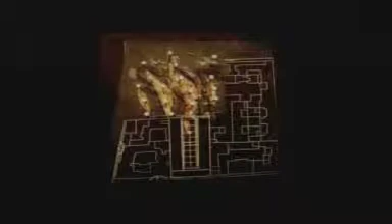You can make compositions on the plasters to see how the movement and the space works, and then you go one section at a time, the various models that are the elements we work with to make the proportions and work on the volumes.

And then slowly and gradually we concluded with this plastic model in the first part of the competition, because we believe that Rome, a warm, Mediterranean city where it is beautiful to live, we have to fill or close all this space with a roof.

This roof is like a glacier. It's on different levels, and it is not a flat terrace, but at the same time, remembering this city, Rome, where everyone lives from above. You see, Rome is a city of squares for me. You move from one square to another, typical of all Italian city centers, but Rome more than others.

There was no beautiful piazza in this square, so this suspended terrazza could become the square of the neighborhood. The difference in level between the old entrance and the new one was 4.5 meters.

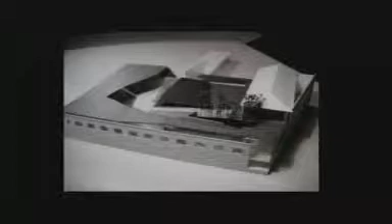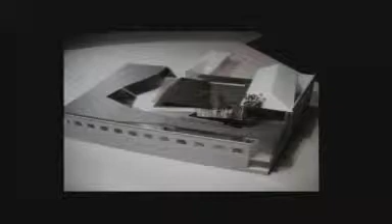So the inhabitants and the citizens of Rome could use the museum as a public square, a public space where it was possible to meet in order to enjoy the space. This square was to be close to a restaurant, a fountain, as in all the squares in Rome. So the square would provide everything which is available in Rome: the restaurant, the fountain, but at the same time...

it was a way to discover through the huge windows, bay windows, the museum, and see some interior indoor exhibition spaces. So you just go there to drink a cup of coffee or to have lunch, and you get a peek into the museum. Now, this is the story I wanted to tell in Rome through the museum.

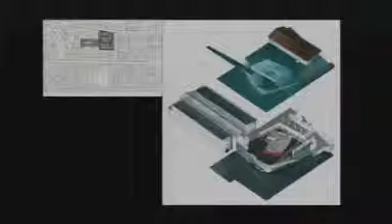Contemporary art is not easy for the general public because contemporary art raises more issues than answers. So in my case, I wanted to make it easier for the museum to be accessible to the general public. So this is why I use these itineraries, passeggiate, and pathways, these discovery pathways, in order to come across contemporary art, even by hazard. I mentioned the Terrazza, the old building.

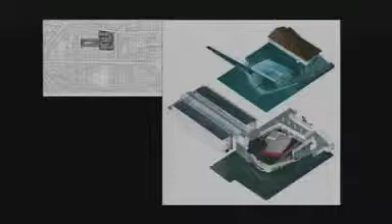This is the exhibition hall, 8,000 square meters on the corner of the building. And per se, this is a white space because when you want to build a contemporary art museum, this... and we're in a Richard Meier beautiful building. It was Richard Meier who introduced this idea, this ideology of Museum of Contemporary Art as a neutral box.

I remember a conversation between Daniel Buren and Frank Gehry when he started, and the question was, is a contemporary art museum, must it be necessarily a box, a white box? He said, not necessarily, because space must resist even when art is inserted in it, but it shouldn't be too strong, otherwise the space eats up the art. So you have to find and strike the right balance between the building and the resistance of space and the freedom of the artist and the artists.

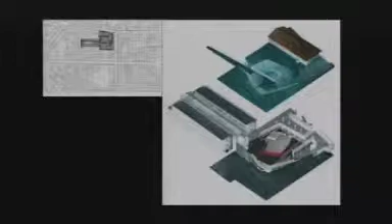This is why I put this hall in the corner in order to have white walls, but the wall separating this from the foyer is not straight, it's irregular. And at the same time, there's a passage mid-height so that there is a passage within. So this is a space which resists as a consequence.

And then I painted everything else in black, all the walls where the artworks are not exhibited. In black. Why black? Because black, and I say it in a Richard Meier building, it is the opposite. White is considered a neutral color. I believe that black is also another neutral color. First of all, it resists more. It's a neutral color.

And artists have to be strong. It's not easy to work on black. So exhibition areas are not in black, but the public areas are in black. Or the black can host some works of art that can manage the black.

So this, as you can see, was partitioned with the cafe looking out onto the street, and you go below to physically enter the museum space. Simple. This glass window enables you to go into the courtyard. The cafe can open up towards the garden because it can be open to sunlight, especially when it's a nice day.

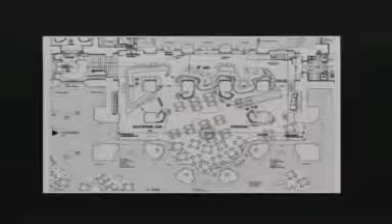The first idea was: because I couldn't touch the columns, couldn't work on the dome or the stones, the idea I got was to put an undulated glass veil behind the columns, making the glass a self-supporting structure. In other words, making it stable and anchoring it well in the ground, because I could work with the ground. It was an external surface that could be restored and renewed.

So this is how I approached it, and I also wanted to add a plane on the volume. This was sacrilege because this was a dome. How can you intervene on a dome? So I continued to propose something that was wavy. I never touched the columns, creating a volume effect without working on the legacy, always working outside on the stones, which were just to be made more lively and not manipulated.

I presented it to the art authorities, the urban planning authorities, and we negotiated. What did I negotiate? I negotiated a line here. I wanted to take this mezzanine to the facades so that I could free the central part here. This line was the result of a negotiation with the planning authorities, so that I could define this mezzanine level and create different spaces here, working on different spaces.

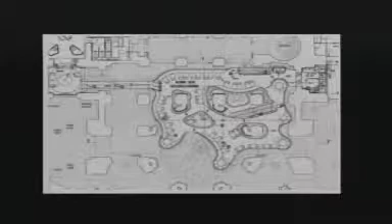And you can choose, for instance, where to dine: downstairs overlooking the street, or upstairs more protected. This mezzanine level was to be a little like a pod, more closed, close to the dome, so that you could feel that you're in a cozy nest, if you like.

And this is the entrance. The entrances had these metal frames. This was a flat section that had to be supported, so we anchored it in the joints, but not on the stones. We also used these window pieces, and we connected them with a steel plate, and it takes them up to the other higher level, and this becomes a metal structure.

So in order to avoid a single pillar in the dome, there was a shell of plaster that was worked in order to make it a little more rugged, because we also wanted it to absorb sound.

You see here the glass above is 3 centimeters away from the stones, and the joints are all in silicone. And this is the surface. Sometimes it is concave in order to provide the sound effect.

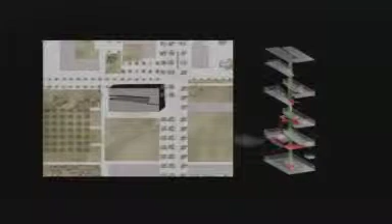Luckily now they've removed the tabletops. We've designed the table mats.

Now this is another project, another Museum of Contemporary Art in Brittany. Here again, other urban planning that was constraining. I had to respect this structure.

This is an abstract French artist, Aurélie Nemours, who passed away 5 years ago. And here we have the only three-dimensional work of art that she created. This is the number 9, constantly declined. These are granite monoliths, the size of about 72 centimeters by 80 in section, positioned at an angle on the lawn, with an angle inclination calculated based on 9.

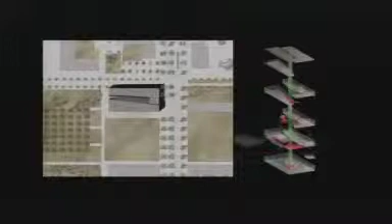She didn't want her work of art to be illuminated by the rear facade of this building. So because I had to bring in a monolith, I was limited. The idea was to fill this volume, so I had to take advantage of the indoor space. So I cut it with this oblique hole, horizontal but vertical as well. This is a cut all the way to the top and all the way to the bottom, a 30 meter hole, if you like.

And then this is in black. It doesn't portray light on the sculpture. And in this facade there is this section. It's covered here. There is a roof, 50 meters in length. This is black stainless steel which reflects, and then black glass, almost transparent, so that throughout the day this volume is a silent monolith. But then when the space indoor gets lit, the space irradiates without illuminating or projecting light onto the sculpture.

This is not yet opened, inaugurated. It will open in July. And then we had the roof and this section, a little at the back. The cement is not black. It's not totally black. It's difficult to have cement totally black.

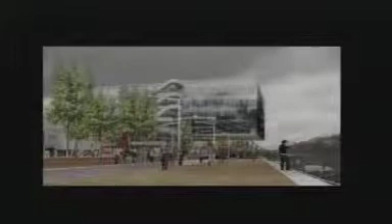And because this building had this shape, we had to spin the atrium, if you like. And so when you enter here, you have a low window view, and you go into the main hall of the building. This was a competition, so...

I had to choose an artist, and I chose Felice Varini, who comes from Tessin but lives in Paris, and he works on perspective. I said to him, I give you the facades, but change them into something articulate and complex. The first answer he gave me is, you can't tell an artist what to do. I'll do what I like. And I said, yes, but it's my facade.

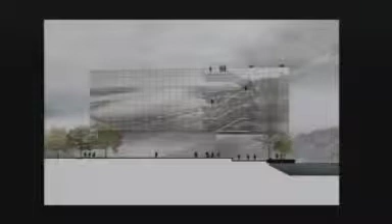So he proposed something which was imposing on the landscape, and architecture has to erase the previous landscape. So he wanted to give the original landscape after I had intervened. So he took pictures in 4 directions from the building and then applied the previous landscape onto the building which existed before my contribution. This is the picture today, which was taken so that it can be applied to my facade.

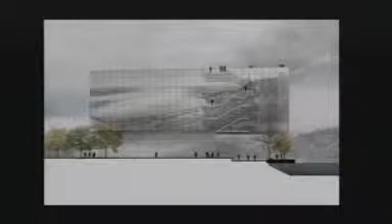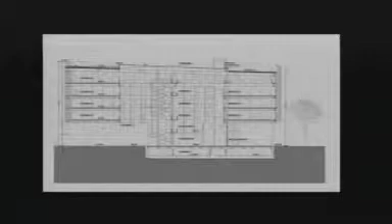Inside there is this glass, the 2 rivers, and we have the 4 facades which provide different looks onto the landscape. We needed 2 pillars in the main hall to support this with a metal structure that goes all round and then propped up by the central pillar, and then suspend all the floors inside.

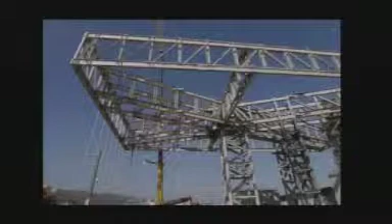Today, this is the stage. This is a month ago. We now have this structure, as you can see, with internal pillars. There's going to be more than one lift, and these tubes here are the structures that will support the floors, 50 meters in height. It's impressive.

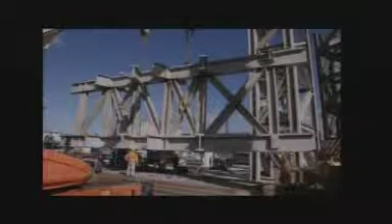And this, just to mention how this metal structure is powerful. This is a beam in the center of the building. It'll be finished at the beginning of next year, we believe. We also drew and designed the lighting for offices. Everything has to be, of course, sustainable.

We can't remove the lowering areas of the ceilings because that's where all the cabling goes. So I mixed a bit of this and a bit of that. We worked with the lighting engineers so that the lighting could be suspended - something that breaks sound but at the same time provides lighting. We worked on these metal petals which are suspended above the offices and they float, both absorbing sound and providing lighting.

I was also asked to work on the river facing structure in Lyon, dealing with the restaurants. Here I chose some round, egg-like structures on the water. This will be the entrance, then the toilets, the kitchen, the restaurant, the cafe, the lounge, the terrace, and restaurant and cafe.

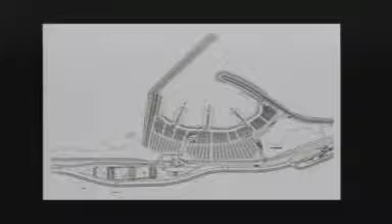This was the site for the terminal for the ferry service, and the passenger terminal is here near the main platform of the port. The waiting room has to be brought closer to the sea. Sometimes the sea is rough, so often the ships can't leave, so the waiting room has to be pleasant. You're ready to leave, but you might have to wait.

And of course you always have your luggage. It's not like in an airport where you've checked in your luggage - in the port you have your luggage with you, so it's complex. You have to go upstairs, downstairs. We wanted a comfortable situation.

So starting from the terminal, we went down a level below with these horizontal passages into the waiting room, and other passages that lead to the satellites of the ferry terminal. Then, in order to board the ship, we avoided too many ramps that go from one level to another - you can't carry your luggage for too long and too far.

And then this area here projects, if you like, into the sea. These parking areas are constantly changing - it's difficult to create green areas. And also, because it's hot, we needed shade. You might have to wait hours for the ferries to leave, even if you're in a car.

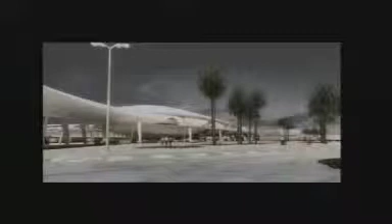So by raising the satellite areas and the terminal, there could be an area for shade while you're waiting to board the ferry. This is inside the terminal and the waiting room with these passages that go through this area. This project has been suspended because of financing.

Archaeologists found one of the oldest skeletons in the world. This is a place where there are many caves, and there are miraculous stones as well. From a cave that collapsed, they found stones considered to be sacred - multicolored stones. So they decided to develop a museum to tell the history of man on Earth and the evolution. At the same time, it's a geological museum.

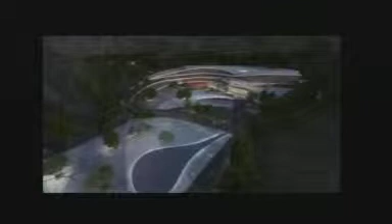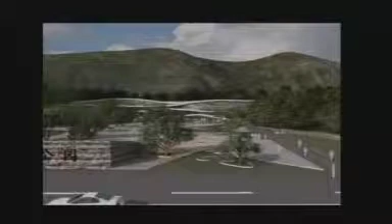They launched an international competition, and we won it at the beginning of the year. So we suggested working on different levels on the mountain so that the museum becomes a section inserted into the mountain. The perspectives here are not very clear from the picture, but they had to be isometric curves into which we bring the museum volumes.

The surfaces are not overlapping one on top of the other, and with the escalators you change level and the space changes - directions and surfaces are different, constantly changing.

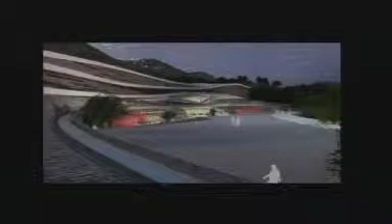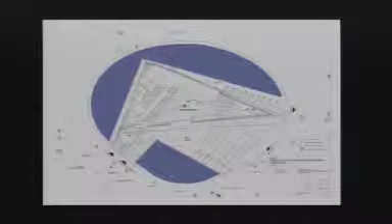Then I said I was willing to attend a jury, and they said, but why don't you give us a project or a design for a pavilion? I said, but what kind? Well, they sent me an email and showed me a section, and they said, this is where you need to build a pavilion. I said, what's the surface? 1,500 square meters.

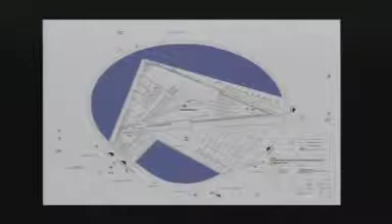We worked in all directions, and 15 days later, I submitted the design. And they said, fine. We worked by email, really, and we exchanged email, my studio and China. And then I received the pictures, and the pictures were exactly what I had designed. I went 4 times.

I visited Beijing at the time. We worked with this strategy. I made the design using the following strategy. I remember

No, but I want to work on this. And don't you want us to discuss? They said, yes, we can meet. You can explain how to do the facade. They wanted to work with glasses, with rivets and so on. He said, leave me the facade and the roof, and you do the rest.

Peter Rice once told me, when you work in these situations, these tenders and competitions, the project is so complex that those who order it don't know how to do it. So let them do it, and you'll see they'll do it. I had to deal with this project from the very beginning, and it was finished exactly as I wanted it. Then we have these laser gadget things that I didn't like, but the rest is exactly what I had designed.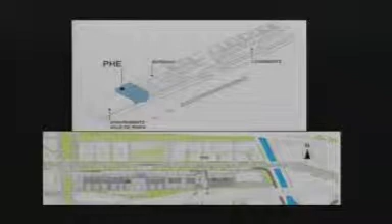So they chose 15 architects. All these architects, almost 15, each architect has its own lot, and they work for the residential area, then the offices. This is going to be an area that is going to become a business innovation center. And then they have an area here for a sports arena. So many architects for this single building. We're working downstairs.

This building is very simple, as you can see. I wanted to use some bubble-like shapes on the facade. I proposed a white facade on the south and black on the north. And then we have the east section, which has a black going into white. It wasn't so much the color that was the problem, but rather these bubbles, these round shapes.

I said that the windows could be round. I had to discuss this for a year. And the master plan was done by Coulas. He decided that this was crystal mineral in layers. The volumes were imposed.

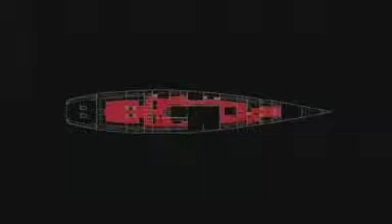the bathroom from the dinette. The dinette is open if you have a person that you want to host here. There's a sliding panel so that you have an extra cabin for the guest, but otherwise you're totally free. And only the bathrooms are closed, of course. And this is the kitchen, total open space that looks out into the central area. And these are the sliding doors. And then there's a library here.

And in the center, we have the kitchen with a bar section. The window door slides, and these steps are carbon fiber and suspended and lead you to the deck upstairs. And this is the main cabin. We have the bed. We designed the bed as well. And this is

an inox reflecting panel. This is the shower. This is the bathroom that becomes a shower. And with holes in the floor. But if you want to take a bath, you close the floor and everything becomes a bathtub.

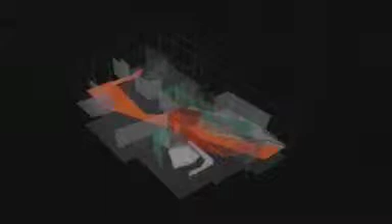In 2004, I attended another competition in Beijing. Ten architects attended, and this was for a block tower that was being built. Every architect had to work on one floor and work on the floor. I wanted to open a space. I wanted open space. That's what I like, so that I can move freely. I'm working on this diagonal and suppressing

partitions, maintaining only the structural supporting walls. We opened everything up, and you see this is the transition from the kitchen to the dining room. Everything is open besides this. And then a big table that provides continuity among the spaces. The living room, the kitchen, continuity between all the rooms.

These are active walls which are transparent, translucid. This is interesting depending on what you want to do in the apartment. You can have intimacy or public air, well, open areas. And then you see this translucid wall when you want intimacy, but then it becomes look through when you don't want privacy.